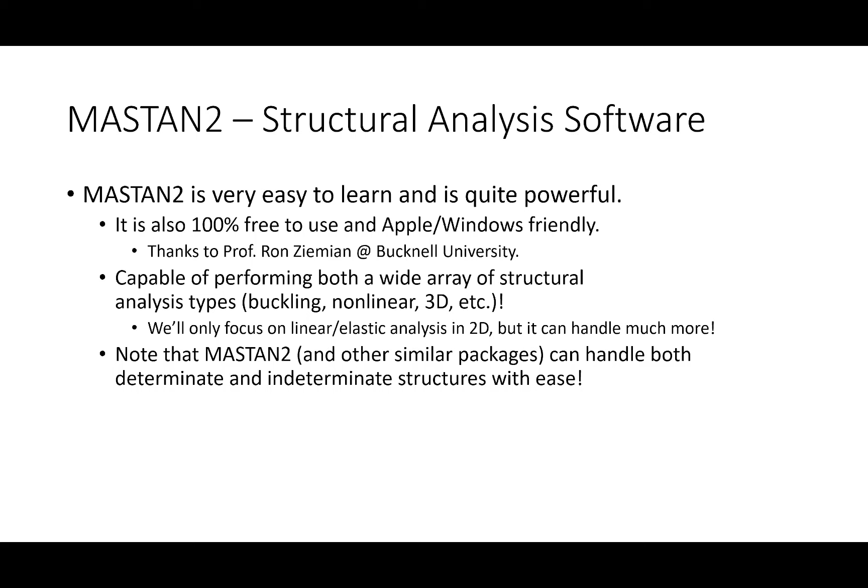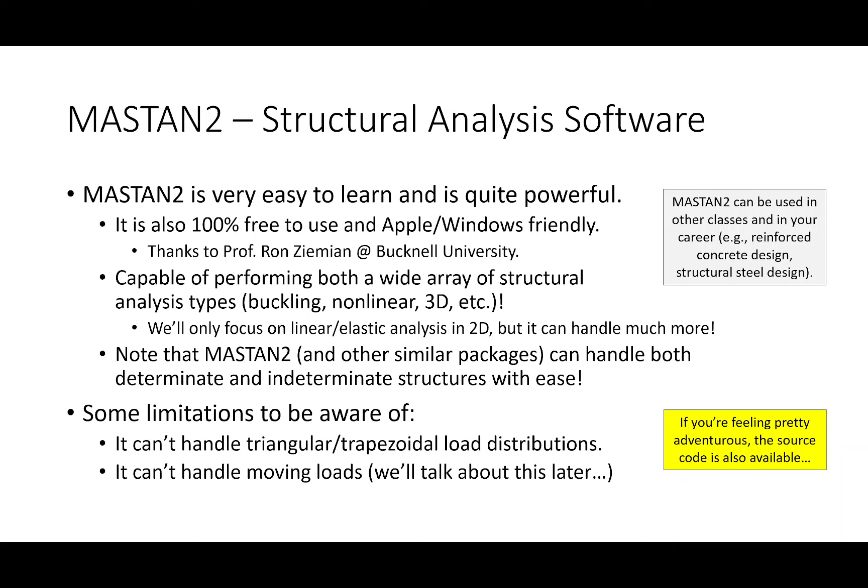There are some limits to MASTAN that I want to mention right off the bat. Number one, it cannot handle triangular loads or trapezoidal loads, so that's something you'd have to do on your own. And it cannot handle loads that move - moving loads will be the topic of discussion next week, so just wanted to mention that. But if you wanted to get adventurous and flex your MATLAB skills, the source code is available, so you could do that as well.

I get the feeling you all are like, let's move on. Okay.

We have not at all discussed indeterminate analysis. Now let's talk about indeterminate structures though. What we have done is classify determinacy. So I have here this structure drawn on the board - it's going to show up on the slides here in a little bit. But how would we determine whether or not this structure is indeterminate? Do y'all remember how to do that?

We calculate the I sub E value. Do y'all remember that? So what is I sub E for this problem up here? We have a pin support, a roller, and a roller, so we have 2, 3, 4 reactions. We have 3 equations of equilibrium. So this structure is indeterminate - indeterminate to the first degree, right? There's one too many unknowns. Okay, keep that in mind.

Okay, now first off, I should have a little bit of an aside as to why we would even use an indeterminate structure to begin with.

Indeterminate structures are, by their very nature, more involved when it comes to analysis. So if you're going to have to do all this extra work to analyze the structure, why even use them? Well, there are two really key reasons why you would use an indeterminate structure.

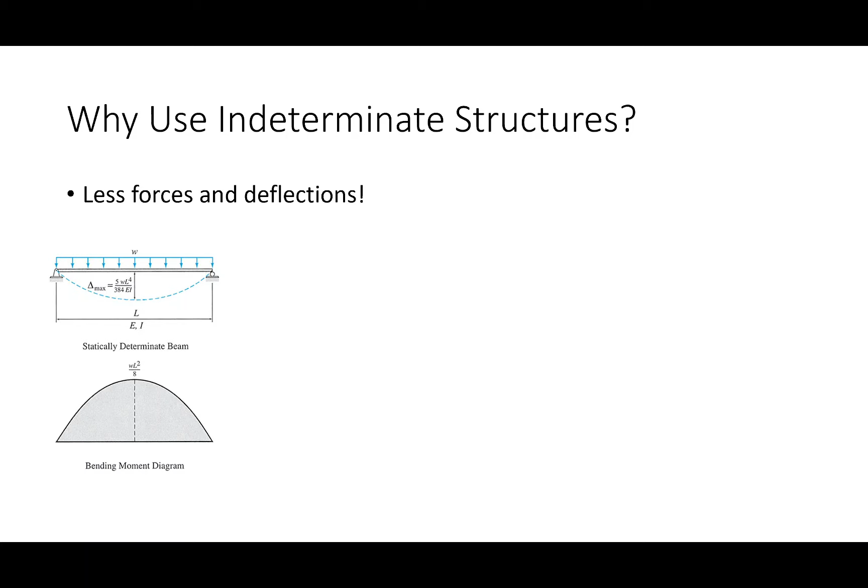The first is that indeterminate structures have a resulting internal response that's less than their determinate counterparts. For example, this is a simply supported beam with a uniformly distributed load. If I look at the midspan deflection, I can calculate that as 5WL to the 4th over 384EI. If I fix both ends, instead of 5WL to the 4th over 384EI, it's 1WL to the 4th over 384EI. So this structure has a maximum displacement that's just 20% of this one. So I could use a smaller beam. Saves money, right? What about the moments? This maximum moment is WL squared over 8. The maximum moment over here is WL squared over 12 or WL squared over 24. So less bending moments, less deflections, okay?

But the other advantage is that they contain redundancy. So if I have a bridge that has a pier in the middle, okay, like this one, that's indeterminate. If I were to stick a hinge right here, that would make the structure determinate, and I can solve it like I've been doing this whole semester. But if that central pier were to fail, that bridge is in the river, okay? But if I leave that hinge out and I keep the structure indeterminate, then if that pier fails, at least the structure is statically stable, okay? So adding indeterminacy adds redundancy to the structure in the event of certain elemental failures.

So why would you use an indeterminate structure? Well, you can use smaller elements and they have redundancy when they fail. That's a pretty good reason to use an indeterminate structure if all we're worried about is a little bit extra math, okay? Does that make sense?

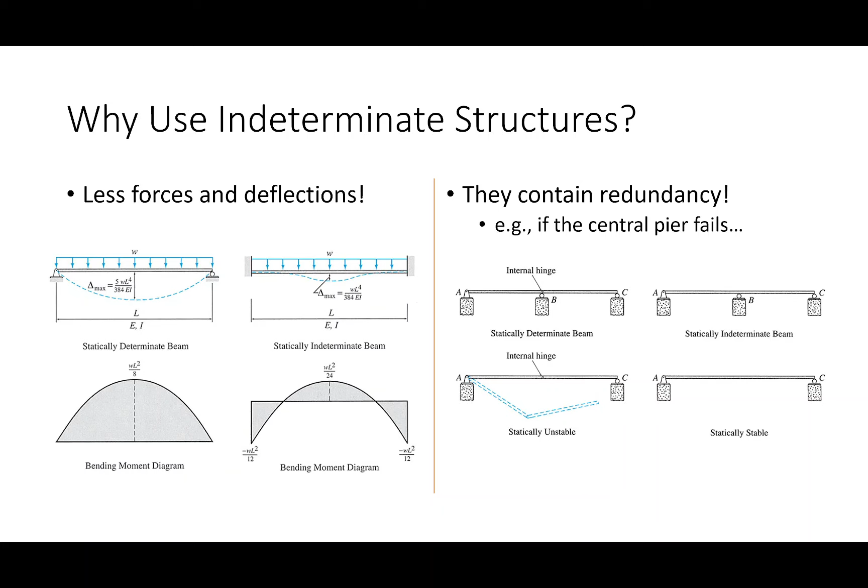Now, that doesn't answer our question in CE 312 as to how to analyze the structure with indeterminacy. So let's take a look at this problem. This is the problem that I have drawn here on the board. This is this problem right here.

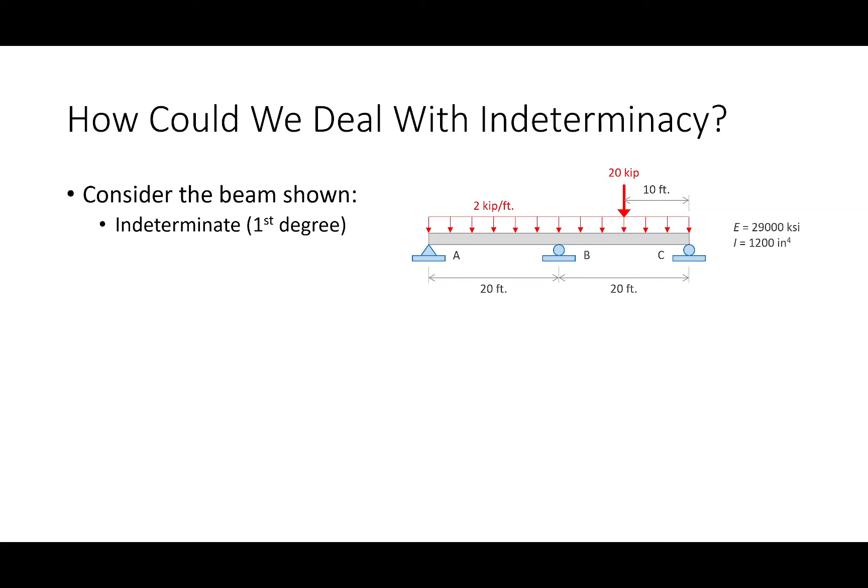So it's indeterminate to the first degree. What I mean by that is there are 4 reactions, 1, 2, 3, 4, and there are 3 equations of equilibrium. Now, we could easily solve for one of those reactions right now. There are, though, no horizontal forces on the structure, so we know this horizontal reaction is 0. That's easy. But we have 3 vertical reactions, and we really only have 2 independent, unique equations of equilibrium to relate them. So we have one too many unknowns.

So how do we handle this? The way that we handle this is we have to use the relationship between forces and deformations, and that is the key to any indeterminate analysis. So we weren't really able to have an intelligent discussion about indeterminate analysis until we had already discussed deflections. When you apply load to a structure, it deforms. If you understand that relationship, then you can analyze an indeterminate structure.

So let me ask you a question. What is the vertical deflection at point B on this problem? What's the vertical up and down displacement at point B? It's not a trick question. It's 0. Point B is a support. The beam is not displacing at point B. If I were to draw what this beam looks like when it deforms, it probably looks something like this. Would you agree it's going to kind of flex and bend something like this? But at point B, it doesn't displace at all, right?

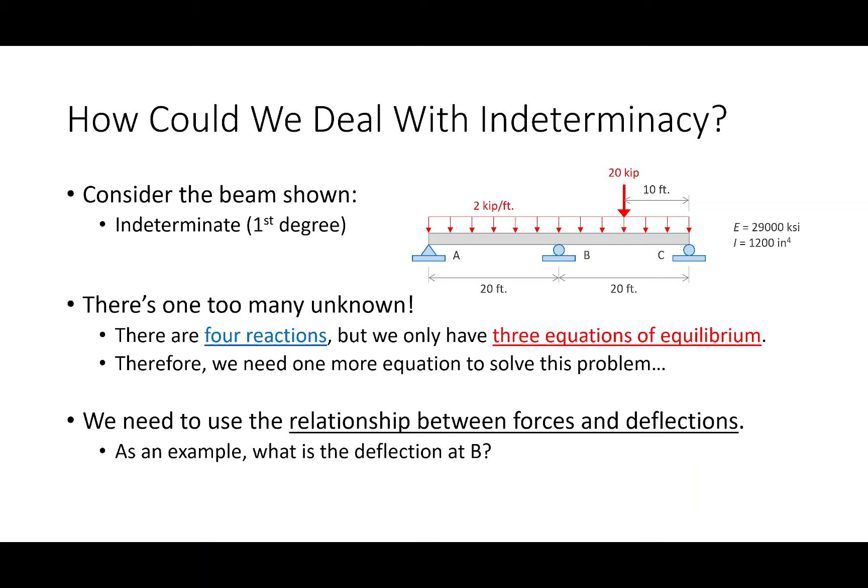Okay, so this is my original problem. I'm going to go through a very basic method for indeterminate analysis. The first thing that we could do is, here's a copy of the structure. What I'm going to do is I'm going to take this roller and I'm going to get rid of it. I'm just going to delete that roller from the structure. So it's gone. Is this problem one that you all can do?

Could you analyze this structure? Well, I mean, you should be able to. We just had tests on it, right? This is well within the realm of possibility. So what we'll do is we'll remove that roller, and we'll allow the beam to deform. So I'm going to call this the primary structure.

Okay, so this is going to be problem 1. What I'm going to ask you is, what is the deflection at B?

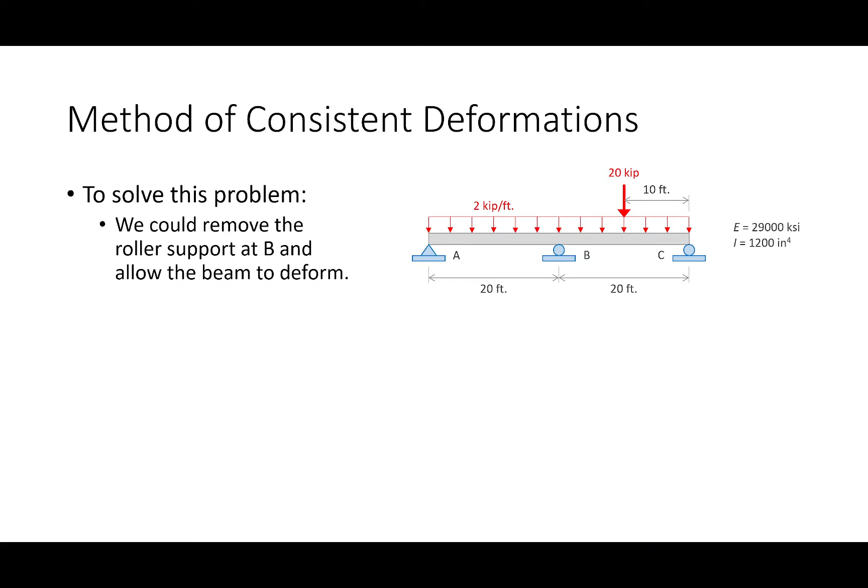So how do you solve for that displacement? Well, you take this problem, you've got a real structure, you do a virtual structure, integrate little m big M over EI dx, sum all that up. I'm hoping you all can do that. I propose that for this problem, you all can check me, this is well within your ability to do. I propose that delta B ends up being 4.22 inches downward.

Is that a reasonable value? Everybody with me on that? Okay, so that's problem 1.

What's problem 2? Well, problem 2, I'm going to call this the redundant structure. Here's how problem 2 works. So if I kick that roller off, would you agree that this deflects 4.22 inches downward? Everybody agree with that?

So what if I then ask the question, let's take the structure, no loads on it, just a blank structure, and let's put an upward force right here, call that By. Here's my structure, let's just look at this problem in a vacuum by itself. Would you agree that this structure is going to flex upward something like that?

Does that make sense? Maybe what we'll ask is how much does By need to be to push the beam upward 4.22 inches. That's a problem you all could probably do as well, right? Maybe a little bit more algebra, but this is definitely a problem you all could do.

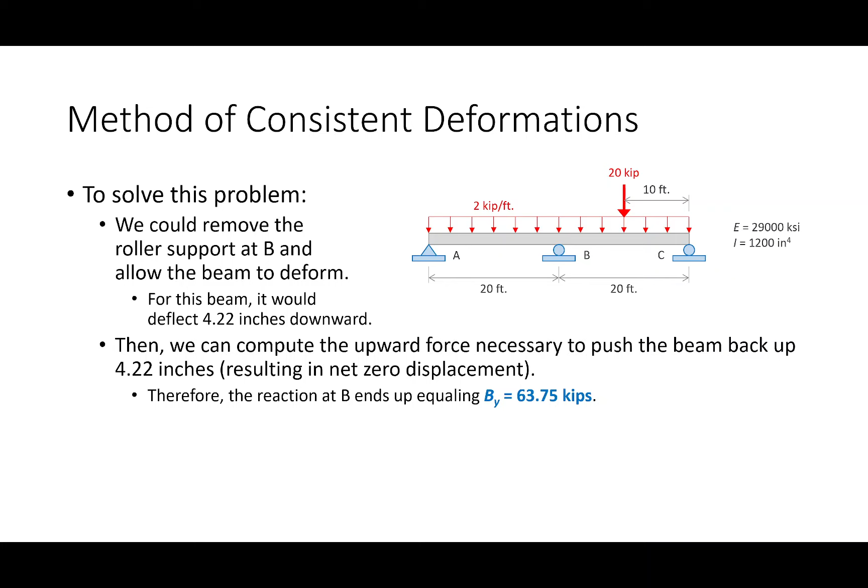You can solve that and you end up finding that the force, By, is 63.75 kips. Once you have that, you can go back to the original problem and say, let's just say that reaction is 63.75 kips, and now it becomes a regular problem. Solve for reactions, draw a shear diagram, draw a moment diagram, the problem's done.

That is the method of consistent deformations, and in a nutshell, that is the most bare bones basic indeterminate analysis method, but it'll work for pretty much any problem you would ever do. So you could get this reaction, that reaction, draw a shear diagram, draw a moment diagram, etc. That's the most basic indeterminate analysis method I can show you. Everybody with me so far?

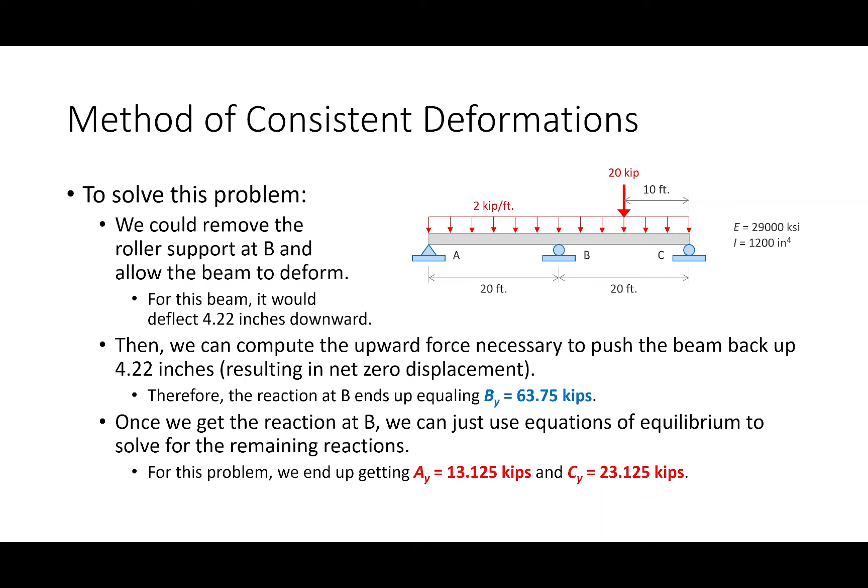Now, a question for you is, do we do this very often in practice? No. And the reason why is because it requires us to select a redundant. Now, everybody in this room is a human being, and we can look at the structure and say it kind of makes sense to select B as the redundant, so we'll deform, push up, etc.

But there's actually nothing theoretically wrong with choosing C as the redundant or A as the redundant. I could actually do the problem the same way. It would completely change the individual calculations and steps of the process, but at the end, theoretically, it would work. Why don't we do that in practice?

Well, the reason we don't do it in practice is because it makes the method difficult to standardize, and more relevant to today's discussion, it makes the method more difficult to write a computer program for. What we want to do is create a method that we can just plug a structure into, click a button, and it gives us an answer.

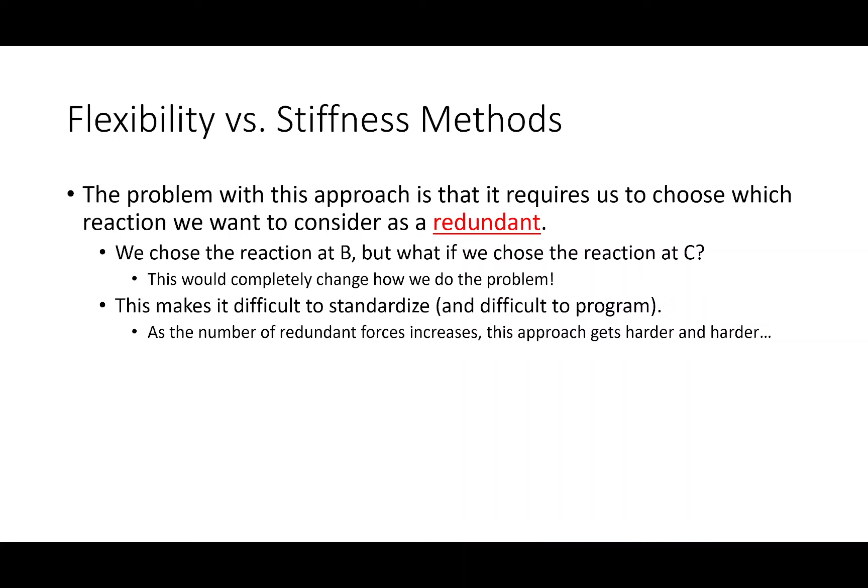And with this problem, let's also be clear, this problem had one redundant. The I value was 1. What if the I value was 47? How would you choose the redundants and how would you systematize the process? It would be a nightmare.

Instead, we're going to flip to an entirely different type of analysis. So what I have here on the board is what we call a flexibility approach. And a flexibility approach is where you're ultimately solving for unknown reactions, like you use this indeterminate approach to solve for unknown reactions. That's a flexibility approach.

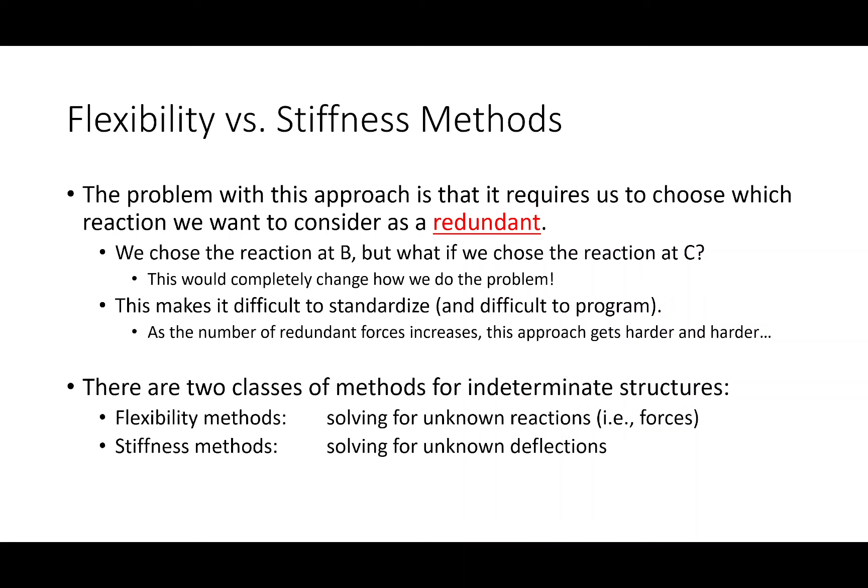A stiffness approach is where you're flipping the script and solving for unknown deflections. It is much more easy to program and standardize stiffness-based approaches. We're going to learn a little bit about that near the end of the semester. So the method that we use, and the most ubiquitous indeterminate analysis method in application, is what's called matrix stiffness analysis. I want to give you a brief insight into how it works.

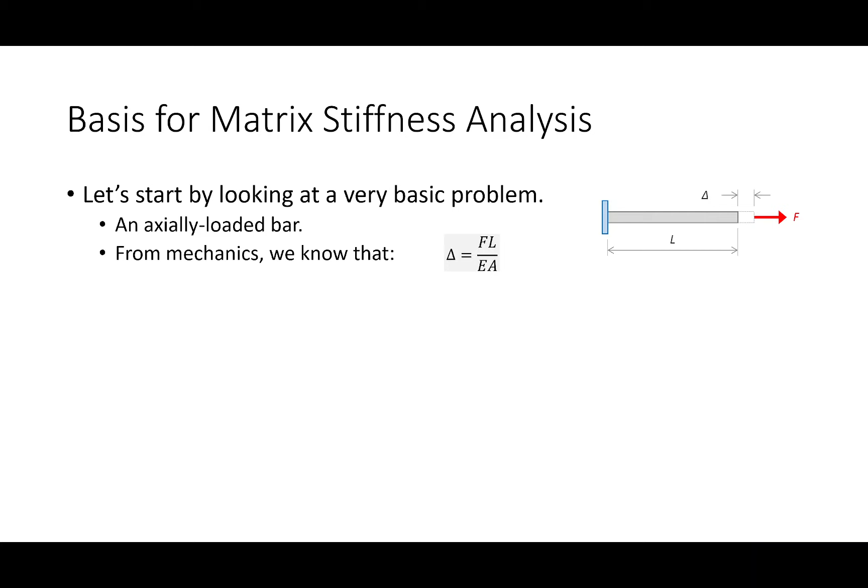Later on in the semester, we'll dig into it with more detail. I want to go back to Engineering 216, and have a very basic discussion about matrix analysis, about an axially loaded bar. I'm going to use this basic discussion to break down matrix analysis. So let's say I have a bar, I yank on it with some load F, it stretches some amount delta. You all should know that we can calculate that amount of stretch as delta equals FL over EA. I'm assuming everybody's comfortable with that.

So I'm going to rewrite that expression a little bit. I'm going to flip and multiply, and say that we could write F as delta times this term right here, EA over L. Or another way I could write it is F equals K delta, where K is what I'm calling the stiffness.

Do you all remember, it's probably Physics 211 where you had spring problems? Y'all remember that? There was a spring, and that spring had a spring constant, a spring stiffness K. Did y'all do that in physics? So it's the same idea.

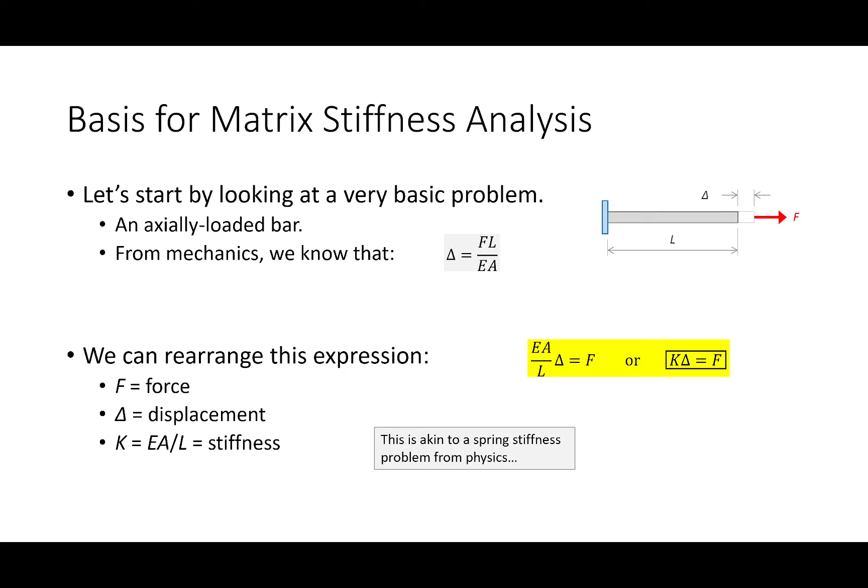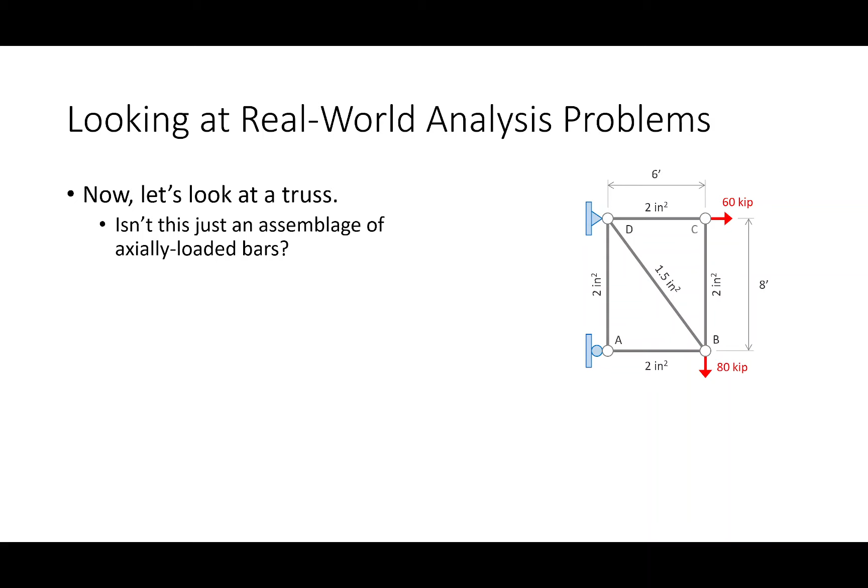For a given element in a structure, I can replace that element, or define a stiffness term for that element. Now I'm looking at a single bar, but I propose that this truss is just a bunch of bars. Instead of looking at it like this big old structure, I want to look at it as an assemblage of bars that are axially loaded. I'm using that term assembly very carefully because we'll talk about that later, how we assemble structures.

So instead of saying the force equals the stiffness times the displacement, instead I'm going to say, well, what about a force matrix equals a stiffness matrix times a displacement matrix? What we'll do is form a model that represents the entire structure and solve for it in one fell swoop. The reason why that's advantageous is because computers solve these problems very, very efficiently. They love doing matrix analysis, and they can do it like that.

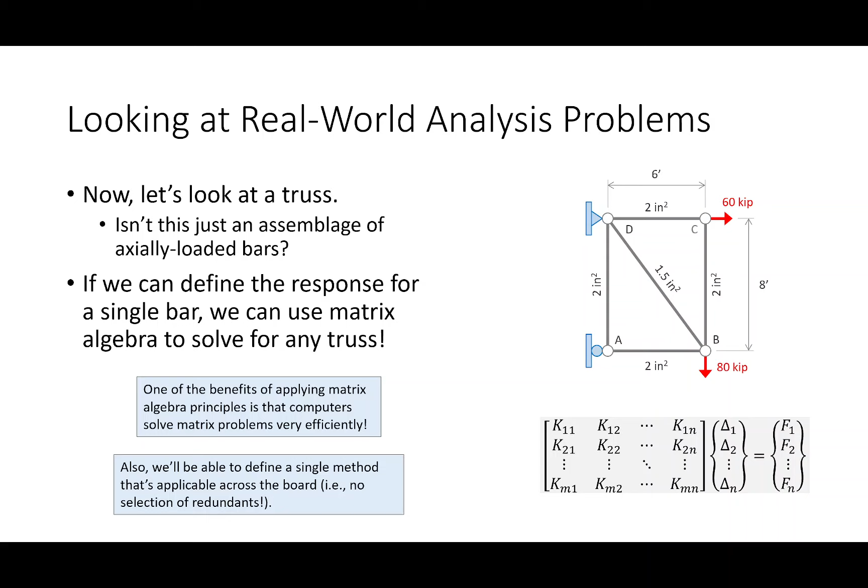So how does matrix analysis work? Here's how it works. I'm going to throw some terms at you that I'll be using over the next few days, so I want to make sure you're clear about that. The first thing that we do is what's called pre-process, which is just a fancy term for creating our model. For a given structure, we're talking about creating the geometry: the joints, the members, the boundary conditions, etc.

We're going to create the loads on the structure. We're going to apply the stiffness to each member, what material it's made out of, how big the sections are, etc. Once we do that, we click a little button called Go, and it just solves the whole thing. How does it do it?

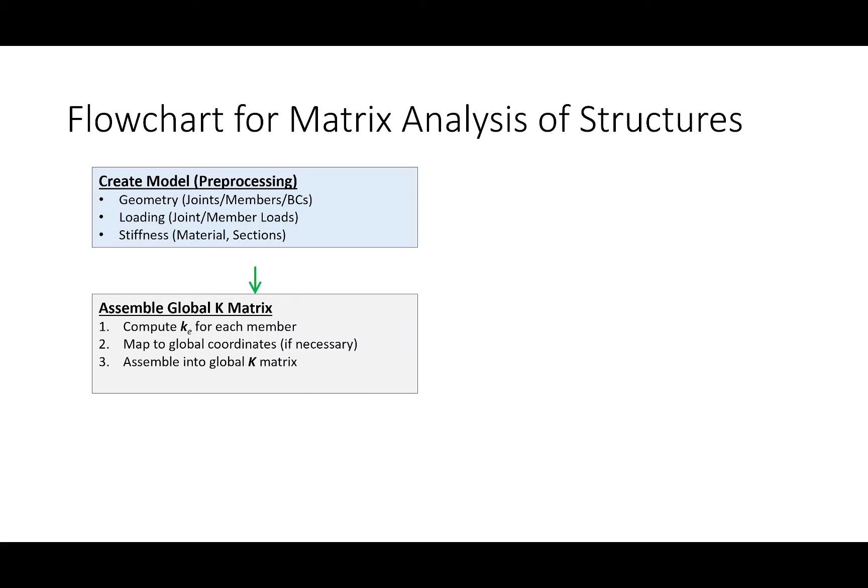Well, the first thing it does is it takes that spring value for each member, and it comes up with what's called a spring matrix, or we call it a stiffness matrix, a K matrix. So we get a stiffness matrix for each member, and we assemble them into a big old K matrix for the whole system. We do the same thing with the forces, because we define the forces that are on the model.

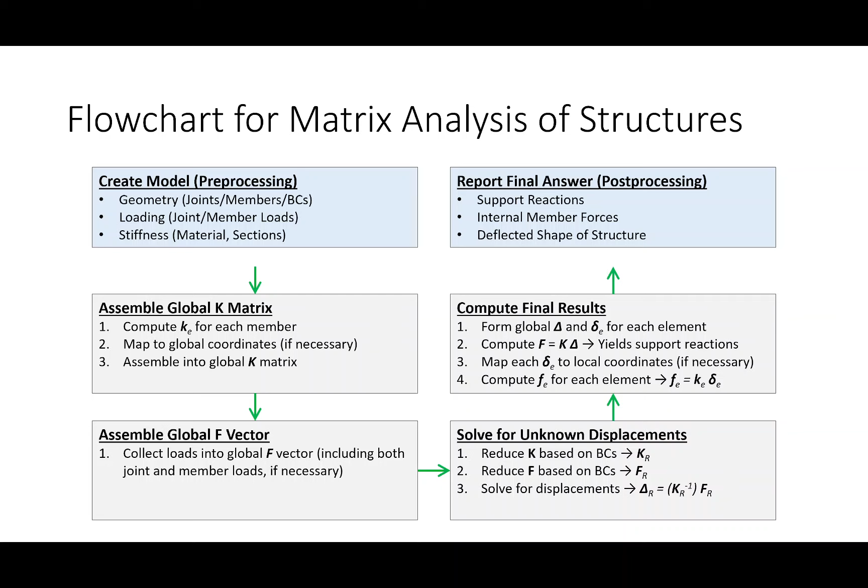So we have our stiffnesses, we have our forces, we then just solve for our displacements. It's just a simultaneous system of equations. Solve for our displacements, take those displacements, plug them back in on a member-by-member basis, get the reactions, get the forces in each element, and then we post-process, which is just visualizing the answer: looking at the support reactions, the internal member forces, the deflected shape, etc. We just click a button, it does the whole thing. We'll go through this process in more detail near the end of the semester.

Now, what we're going to do here are some really simple structures, but you can do finite element analysis for some really out there stuff. This was some finite element models that I created in my research group. We were looking at deformations in bridge girders that are under truck loads.

So this was the underside of a bridge as the truck was going over the bridge.

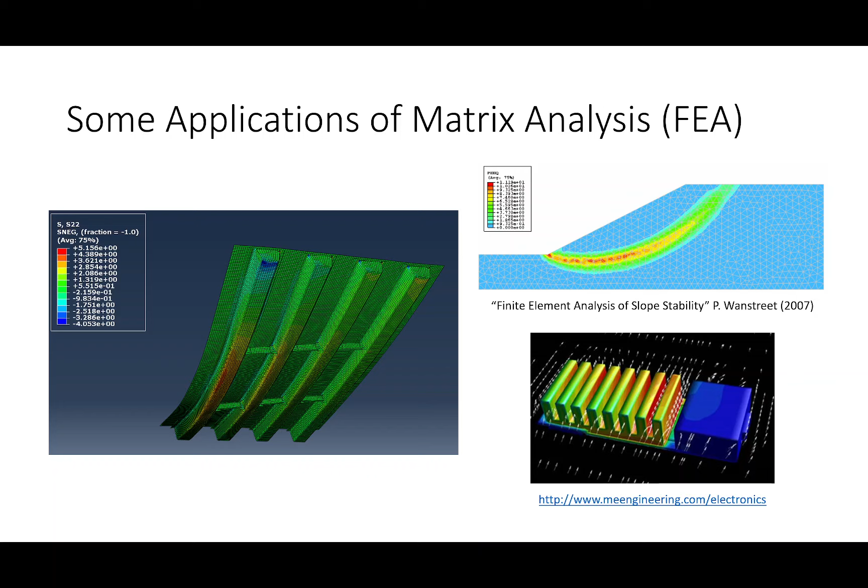This is a slope stability finite element analysis, looking at the slope failure surface and whatnot. You can even do thermal analysis and stuff. You can do some really crazy stuff with matrix analysis.

Okay, any questions? All right, so let's talk about MASTAN.

I've got a handout that I'm going to pass out, and it'll be sort of a guided exercise that we all do together. But before I pass that out, I want to make sure there are some ground rules on how MASTAN operates. This is really important because this is the type of stuff you can make a mistake on when you're running MASTAN.

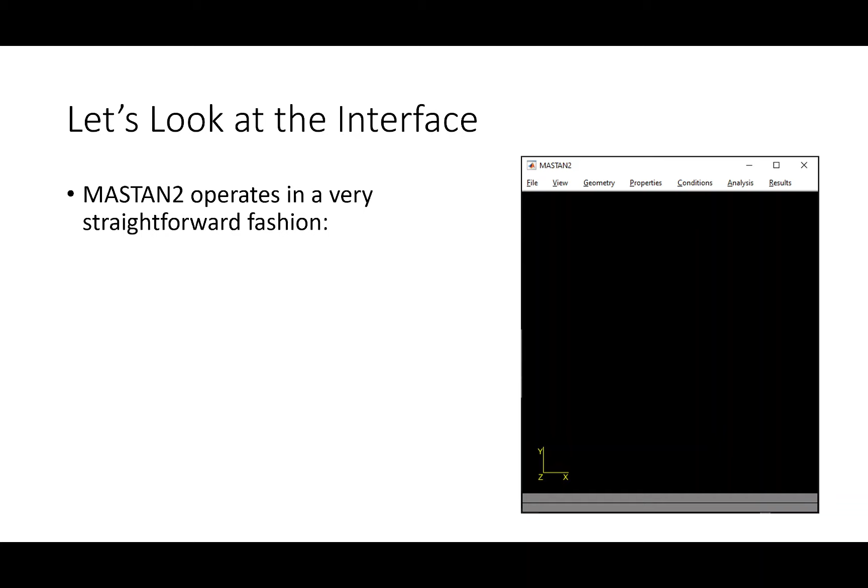So first off, if you run MASTAN, if you open it, it looks like this. It's a pretty basic interface. The first thing you should notice is you've got the menus up here. So what you do is you open the menu, and it'll contain all the necessary commands to build a model or execute a model.

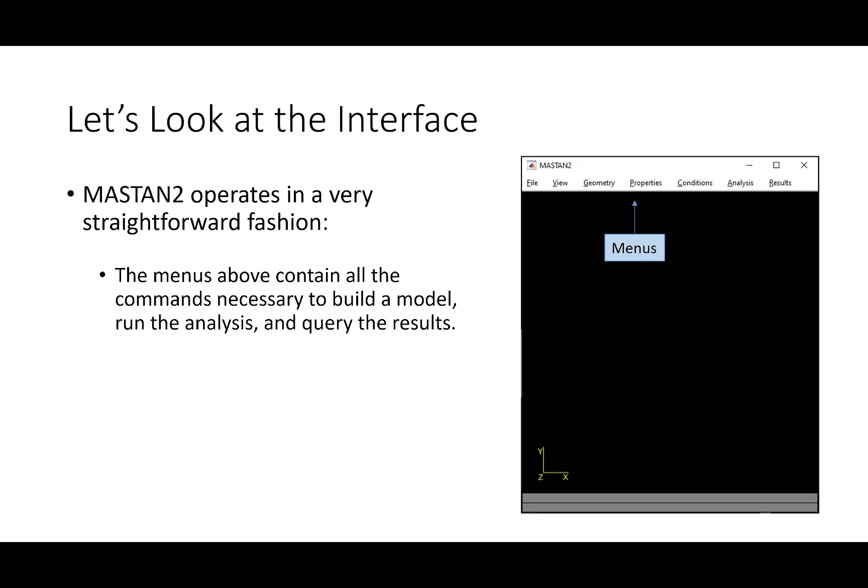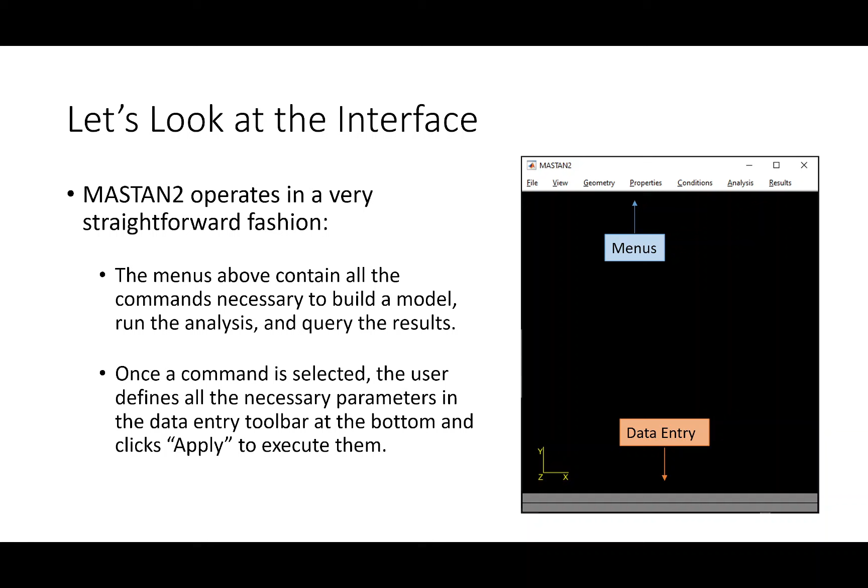So in the menu, you will call a command, and when you call that command, all the data entry for that command will be down here. So you just call a command up here, enter in all your values down here, click the little apply button, and everything will get executed.

There are several menus. I'm not going to spend a whole lot of time talking about the file menu or the view menu, but there are a couple things maybe worth mentioning.

In the file menu, there's an option to export a photo for a report. This is great for your homework assignments, because I'm going to ask you to do a homework where you're generating a model, and you can literally just export the photo right here. Creating a report is also kind of nice, because you can say, give me all the joint displacements, give me all the member forces, and it'll do it.

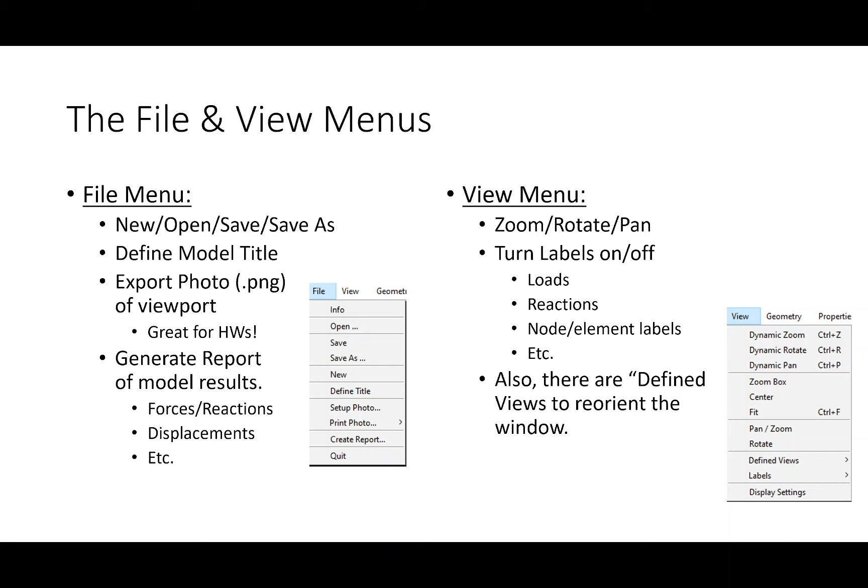The view menu, you probably won't use all that much, but this is if you want to rotate or zoom or what have you. Okay, units.

Let's talk about units. Whenever you're writing a structural analysis package, there are two ways to handle units. The first is to build a program that will convert the units for you. That is convenient, but the problem is if you're using a unit system that's slightly different, your hands are shackled. The other way is to just not incorporate a unit system at all and allow the user to use the units that they see fit.

This is how MASTAN works. There are some programs, like Abaqus, they make space shuttles with Abaqus, and this is what Abaqus does, so there's definitely a precedent for that. So as the analyst, you need to adopt a consistent unit.

So what I'm proposing we do here is we do our forces in kips, and we do our member dimensions in inches. Now, the nice thing about MASTAN is that when you're entering the coordinates, you actually do the calculation inside the data entry, so it makes it a little easier. You don't have to actually calculate values on the side, but you do need to multiply your member lengths by 12.

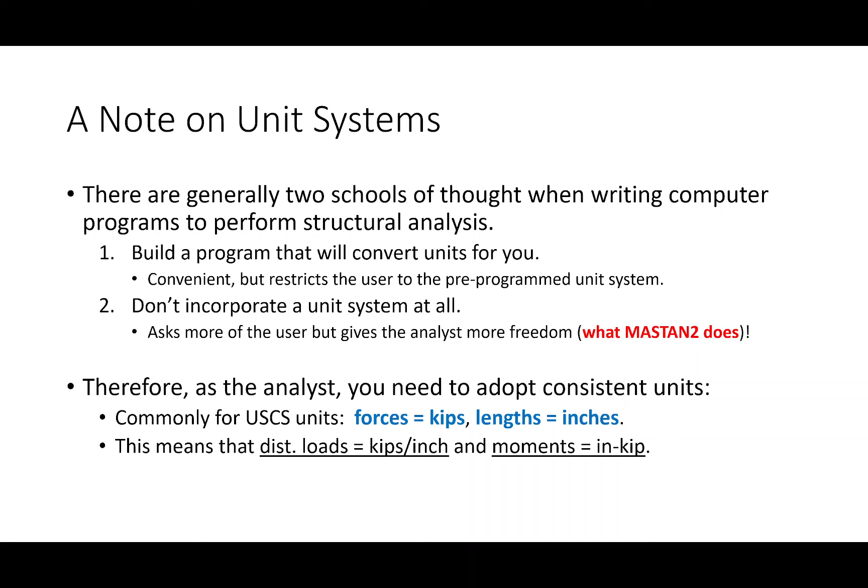You need to divide your distributed loads by 12. You need to multiply your moments by 12, etc. And that's why we do this, so that we have practice for it. Just wanted to make sure that was clear. Okay.

In terms of sign conventions and terminology: first off, terminology, I am going to use the term joint and the term node interchangeably. I'm going to use the term member and the term element interchangeably. They mean the same thing respectively, okay?

Units, again, kips and inches. I'm also going to want to make sure we're consistent in our sign conventions. So what do I mean there, okay?

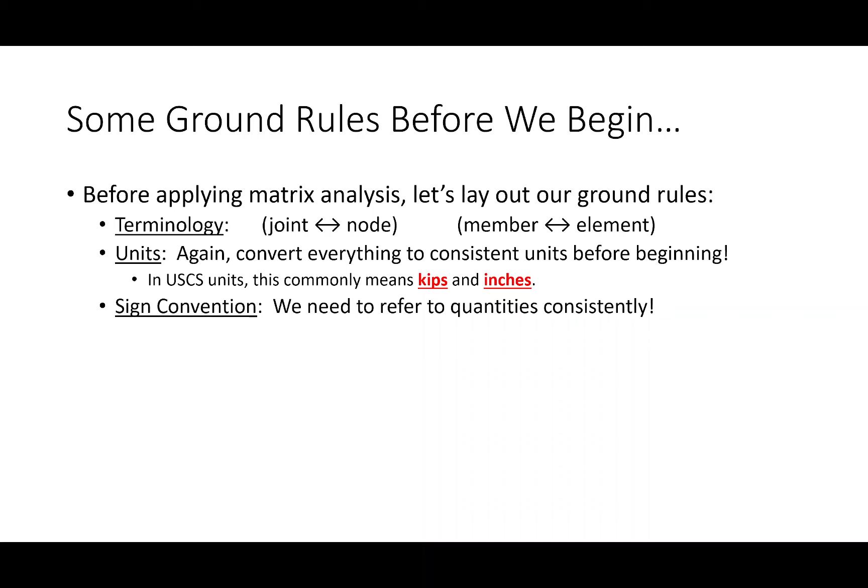For the x direction, we're going to consider forces to the right being positive. So, for example, if we do a structural analysis and we get a deflection in the x direction that's negative, that means it's to the left. So MASTAN is already adopting rightward forces and displacements as positive, and y direction upward forces and displacements are positive.

For rotations, it's assuming counterclockwise moments—counterclockwise rotations are positive. And for axial forces, tension is positive. The reason why is, like when we do a matrix style analysis, we have to write equations of equilibrium over and over again, so we have to have some sort of consistency in our sign convention. Also, we're going to keep things in 2D. We could expand all this to 3D, but we're not going to do that in here.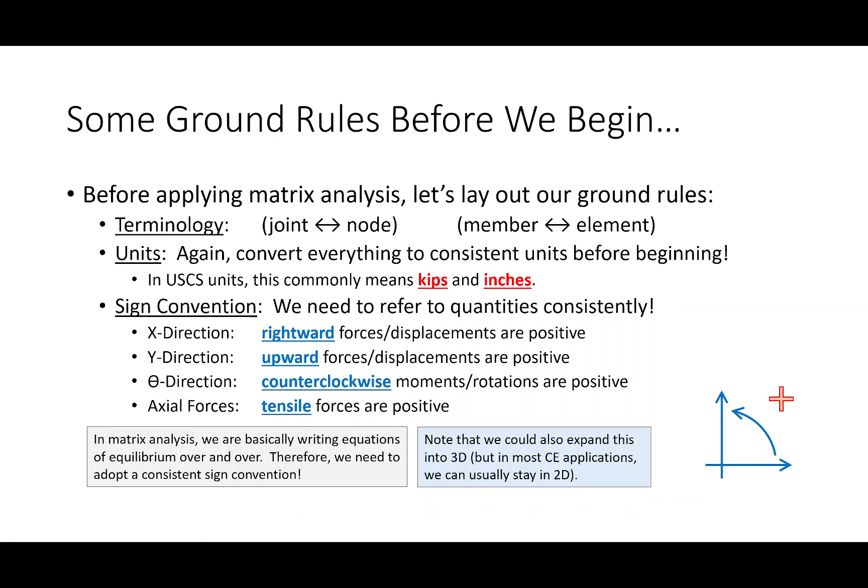In most civil engineering applications, you try and stick to 2D if you can. Building a model and running a model takes 5 steps.

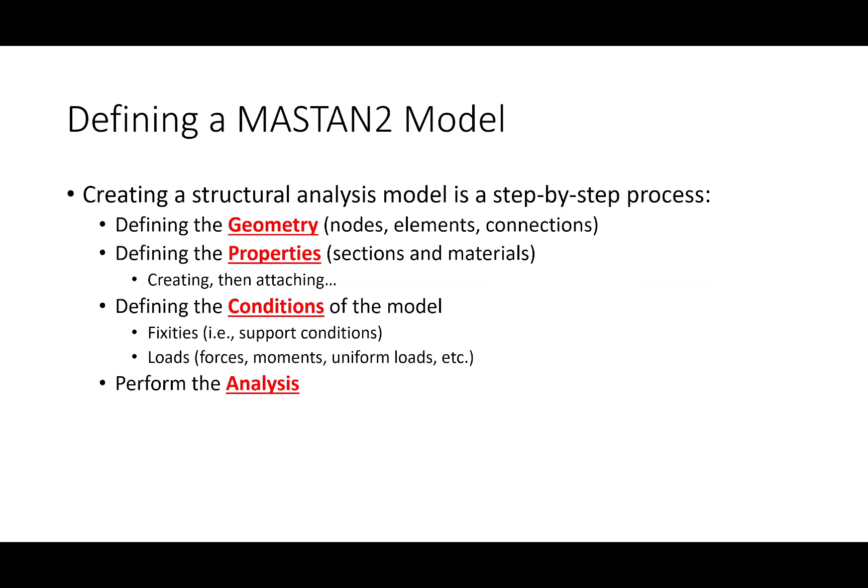First, you define the geometry. Then you define the properties and attach those to the material or model. Then you define what are called the conditions. I'm using the terms that MASTAN is reading, so if you look at the menu on the very top, it should literally have geometry, properties, conditions, etc.

You'll then analyze the structure and post-process the results. The model or example that I'm going to do with you here is this example. If you look at the slides, you'll see these little buttons so you'll be able to follow along with me and know what step I'm on as we do it.

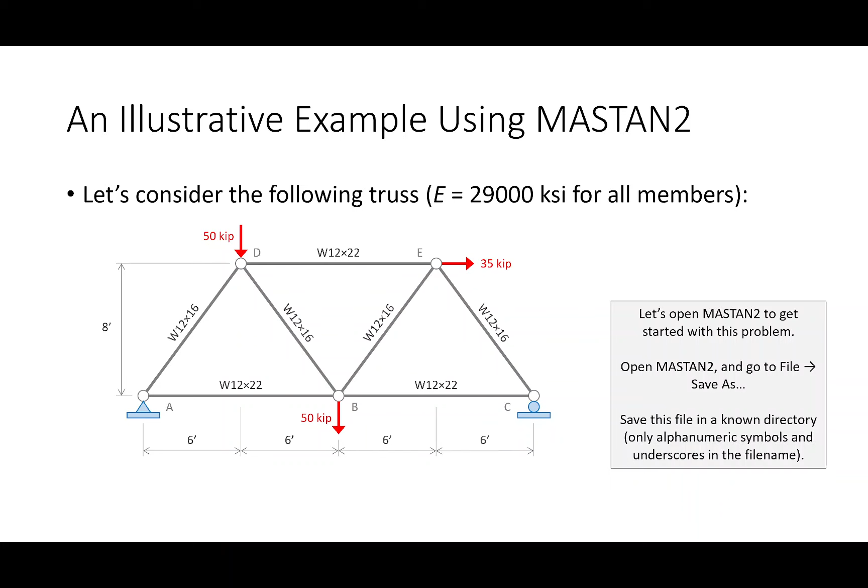This is a MATLAB-based program, so you do need to follow MATLAB conventions when naming files — no starting with symbols, no spaces, things like that. I'm fully fine with you all working a little bit on your own, but I'll say a few things while we're starting.

In terms of terminology, I said I was going to use the terms node and element interchangeably. A node is where the software directly computes deformations. The way matrix analysis works, you directly compute the deformations at the nodes, and everywhere else it's interpolated. So as an analyst, you want to place nodes at all the support locations, anywhere there's a hinge, anywhere there's a truss joint, anywhere there's a point load. If you have any other points of interest, go ahead and put a node there.

Elements are the regions — matrix analysis breaks down the model into these discrete regions that we call elements. It writes a stiffness matrix for that element and then assembles them.

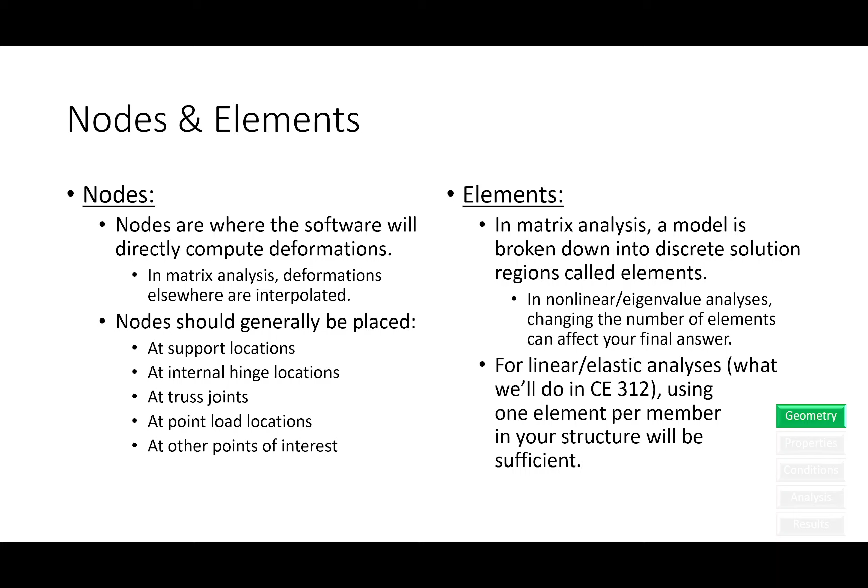For the types of analyses we're going to do, one element per member is completely fine, but if you're doing a nonlinear analysis — like for example this redundant structure — I would model it with an element from here to here and an element from here to here. But if this was a nonlinear analysis, I might use 10 elements and 10 elements, because the more elements you use, it can adjust your accuracy. But that's only in nonlinear land.

Whenever you're defining your geometry in MASTAN, the geometry is relative. For example, if I wanted to create these two joints, and these two joints need to be 100 inches apart along the x-axis, I could put this one at 0,0 and this one at 100,0. I could put this one at 0,36 and this one at 100,36. I could put this one at 25,0 and this one at 125,0. It doesn't matter as long as you use a consistent origin.

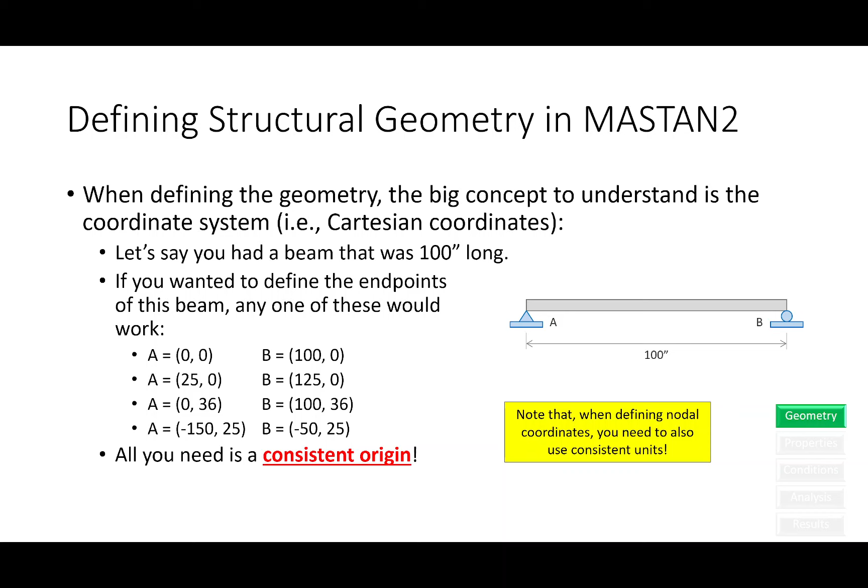If you look at the very first page on the handout that I provided, I'm assuming the origin is at node 1, so the coordinates of node 1 are 0,0. This is the y-axis, this is the x-axis, and I'm going to treat that as 0,0.

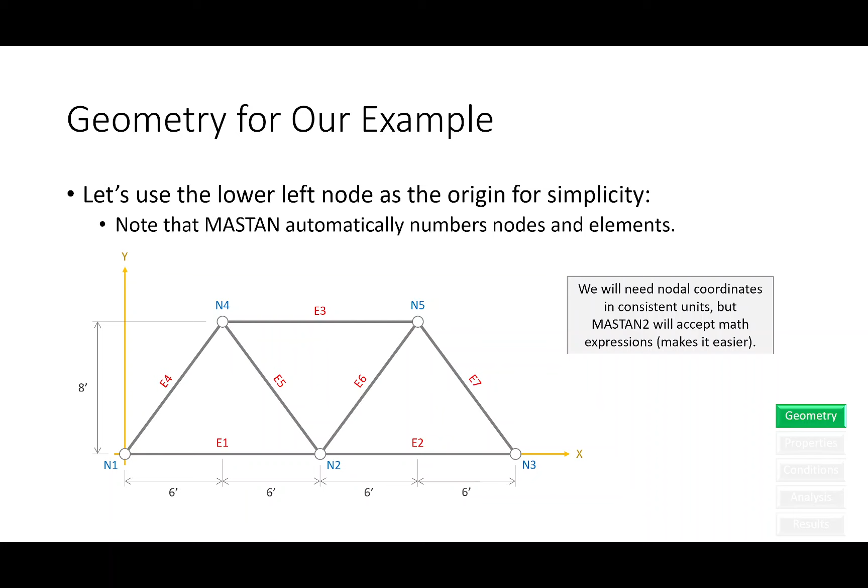One thing I should mention: nodes are numbered, not lettered. So they're not going to be A, B, C — it's going to be 1, 2, 3, 4, 5, etc.

First thing I want you to do is create your 5 nodes. Notice that when you're doing the data entry, you do not have to type the number 144 — you can do 12 asterisk 12, and it will do the calculation. So you can have MASTAN do the calculation for you. You do have to enter a z-coordinate for those, so the z-coordinate is 0 for all of them, but you should be able to create your 5 node coordinates.

Again, just go to geometry, define node, and go through that. I'll give everybody a sec on that before I jump on to the next thing.

Let's go back and see how everybody's doing with their nodal creation. Remember, you don't have to type in a value like 144 directly. You can enter 12 times 12 and it will work. You can do the math directly inside MASTAN.

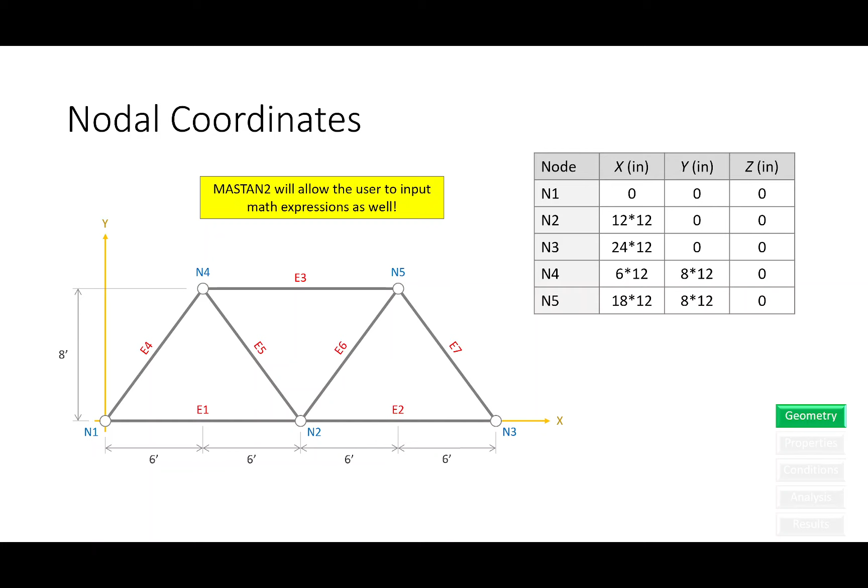After you create each node, for example if you do the first node, you'll enter 0, 0, hit apply, and you should get a message on the right that says success, node 1 defined. You'll repeat that 4 or 5 times. Also, if you need to delete a node, you can delete it and restart. I see some of you have nodes you probably need to redo.

Let's look at this. For N4 and N5, I'm going to cancel this, go to geometry, and move nodes. We're going to move this node and this node. How much are we moving it? We're going to move up the Y axis 8 times 12. Wait, oh, I need to click this. Yeah, okay.

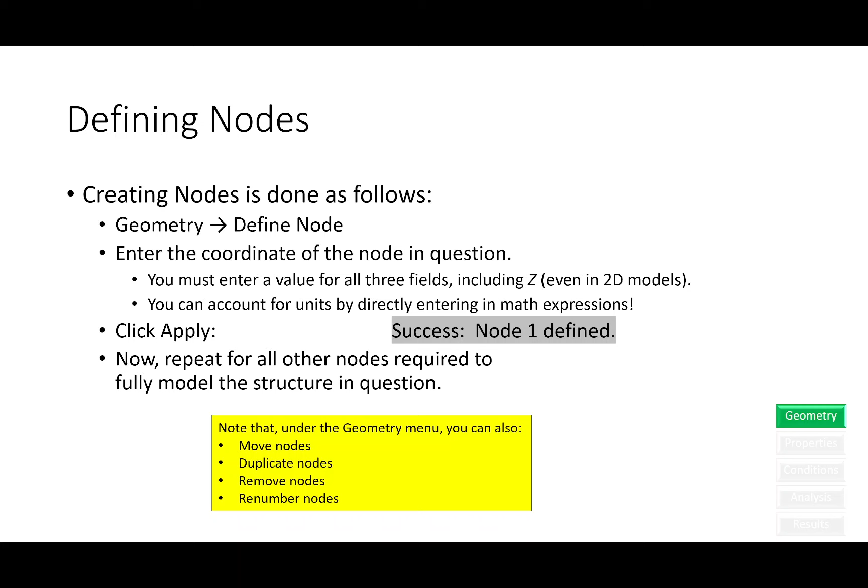MASTAN does give you a number of different means of correcting your mistakes. After you define the nodes, the interface should look something like this. I've inverted the colors here on the slide, so you're actually seeing a black interface with white text, but it should look about like that.

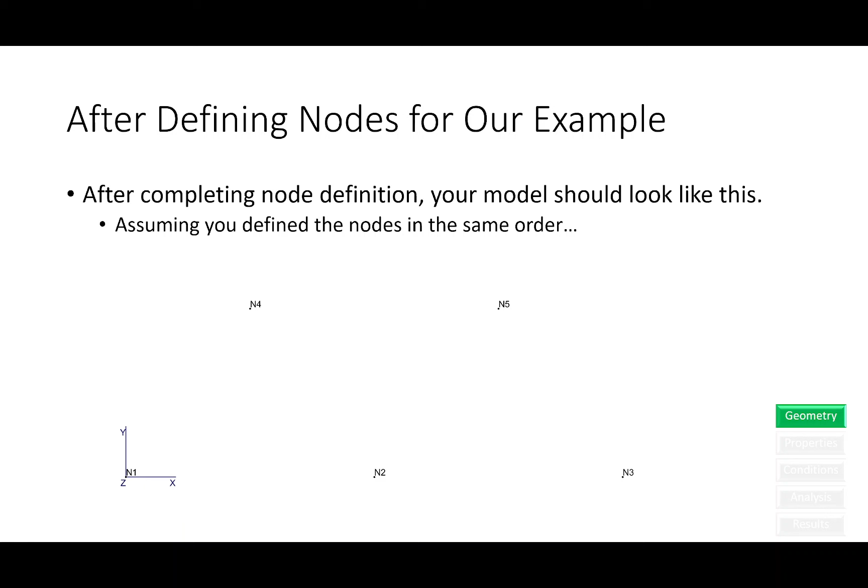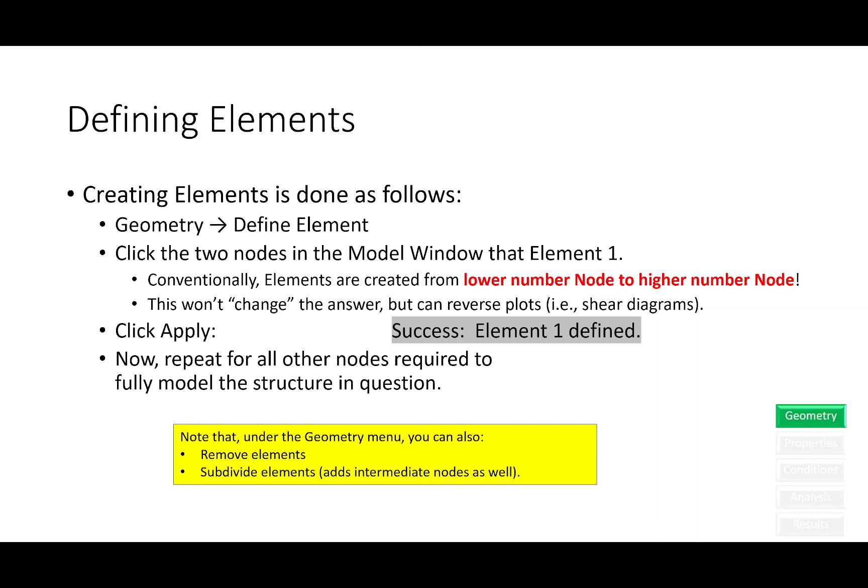Next you're going to define the elements. Defining elements is pretty easy because all you have to do is draw a line. One thing I strongly suggest in your modeling practice: when you create elements or members, draw the line from the lower numbered node to the higher numbered node. For example, this member right here, create it from N2 to N4, not the other way around. It won't really matter for this problem, but for beams and frames it really does matter, so get into the habit of going from lower to higher numbered node.

When it's all said and done, this is what your structure should look like after creating the geometry. It should have your 5 nodes and all of your members, and the members should be rendered with a dash dot, dash dot, dash dot line. MASTAN renders members as dash dot because they have no property definitions yet. Once you apply the materials and sections, the lines will become solid, so it's an easy way to see that all the properties are defined.

All right, everybody got that? Any questions about step 1? Step 1 is the geometry, creating the geometry. Anybody have any issues? And again, if you're chugging ahead, that is okay, I am fine with that.

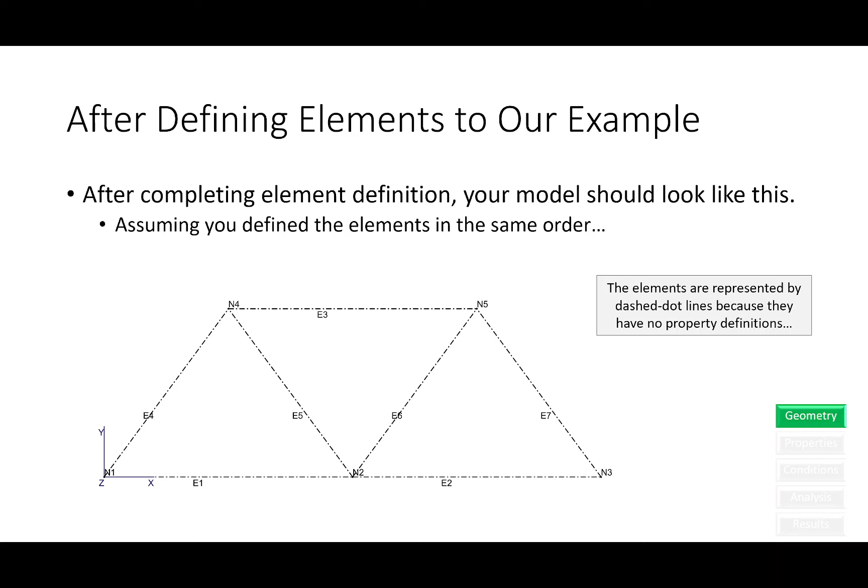A couple other points on member orientation. When you're creating members, it doesn't really matter about this thing called element orientation. Element orientation is when you draw the element from node 1 to node 2, but the element itself is rotated. That doesn't matter for trusses, but it does matter for beams and frames. Won't matter today. On Friday we'll use the geometry menu to define connections, since connections are how MASTAN models hinges and similar features.

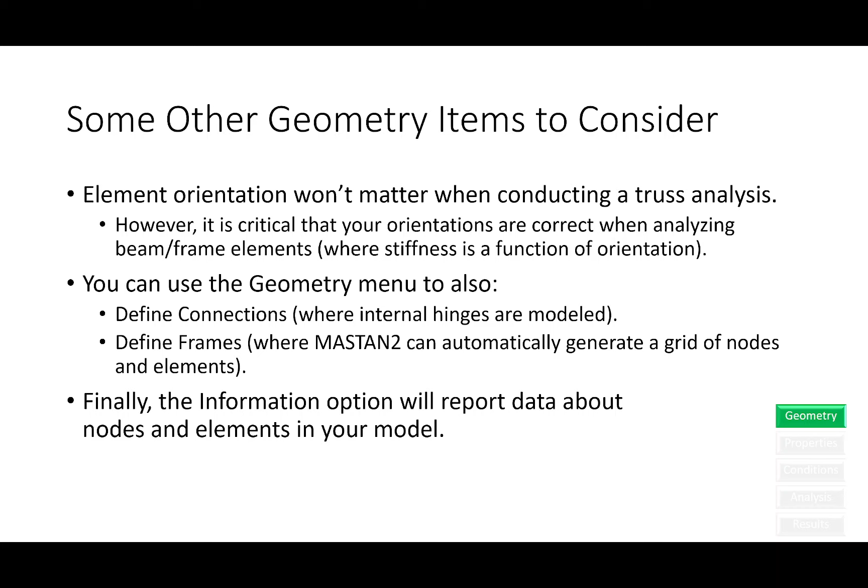All right, we're done with geometry, now we're going to move down to properties. In properties, you're going to create two things: sections and materials. Sections and materials are where, essentially, looking at this problem on the board, the materials give us the E value and the sections give us the I value. There are two ways to create a section: you can create one from scratch, which is what we'll do on Friday, but today we're going to use the library. The nice thing about the library is that all these sections are already in there.

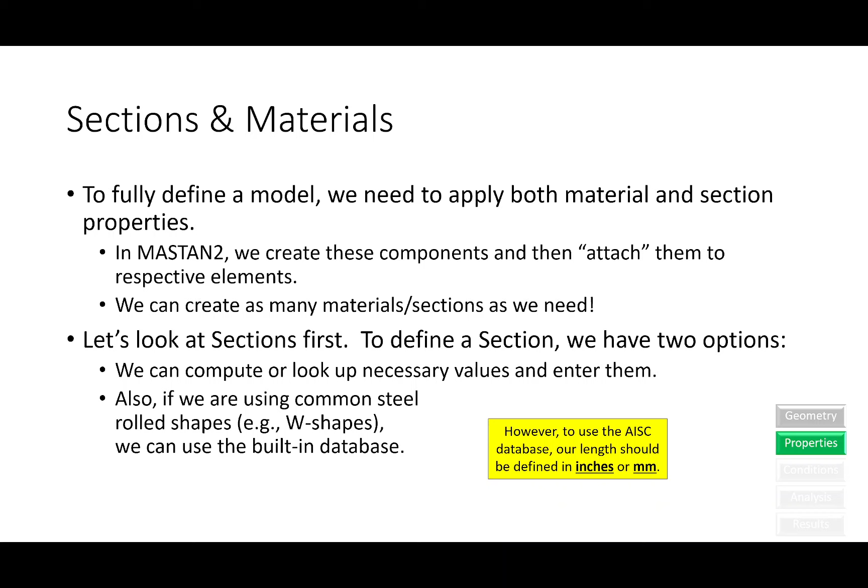So for example, one of the truss members that's horizontal is a W12 by 22. What you'll do is go to Properties and Define Section. Instead of entering in all those numbers at the bottom for a W12 by 22, just click the little database button and you'll get a big list. Just find the W12 by 22 - all the sections are built into MASTAN.

It's almost like I thought about that when I was devising your class project, and I would devise a project where you had to use sections that were already inside MASTAN. It's crazy I would consider something like that. It's like I was trying to make it easy on you or something. You're welcome.

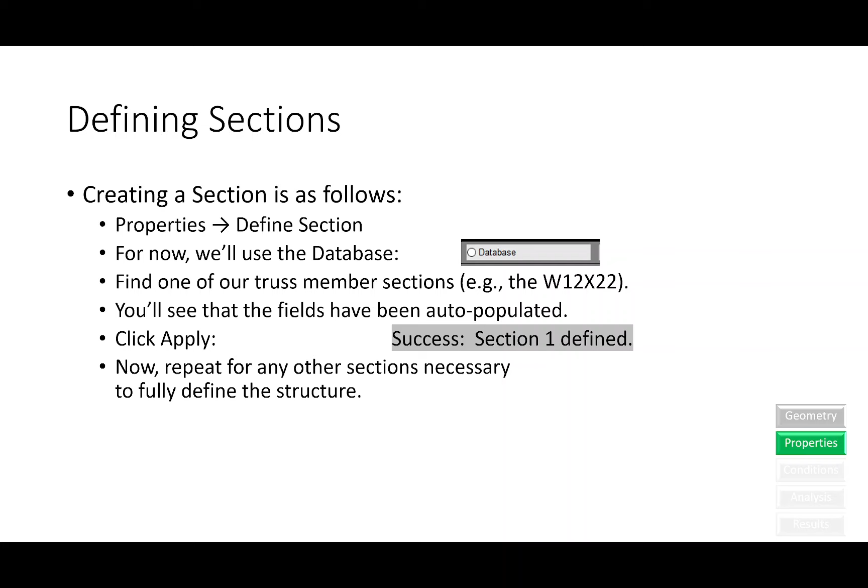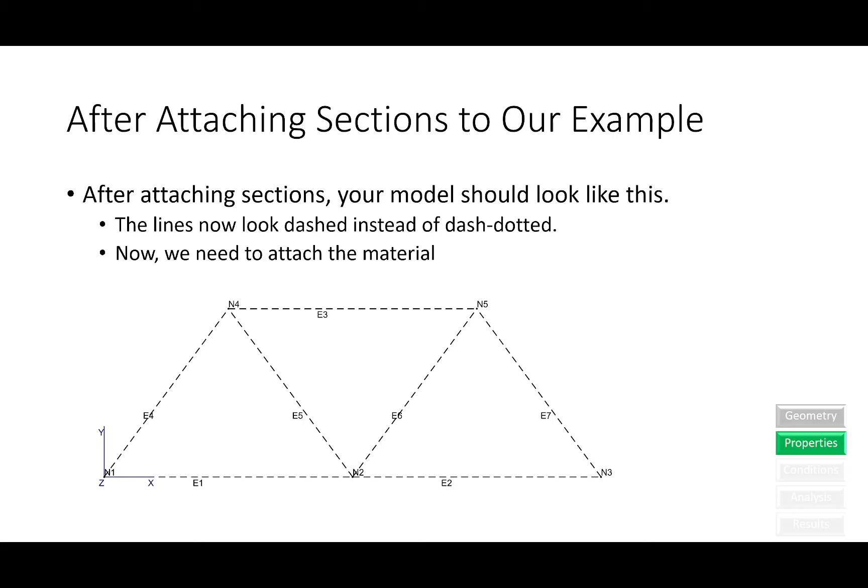Whenever you're assigning sections, you have to create the sections, then attach them. So you'll attach the sections to this, this, and this, then create another section and attach it to this, this, this, and this. The line rendering will change - it'll go from dashed dotted to dashed. That rendering says there's a section defined, but no material defined. Now the material - oh, I went ahead one too many.

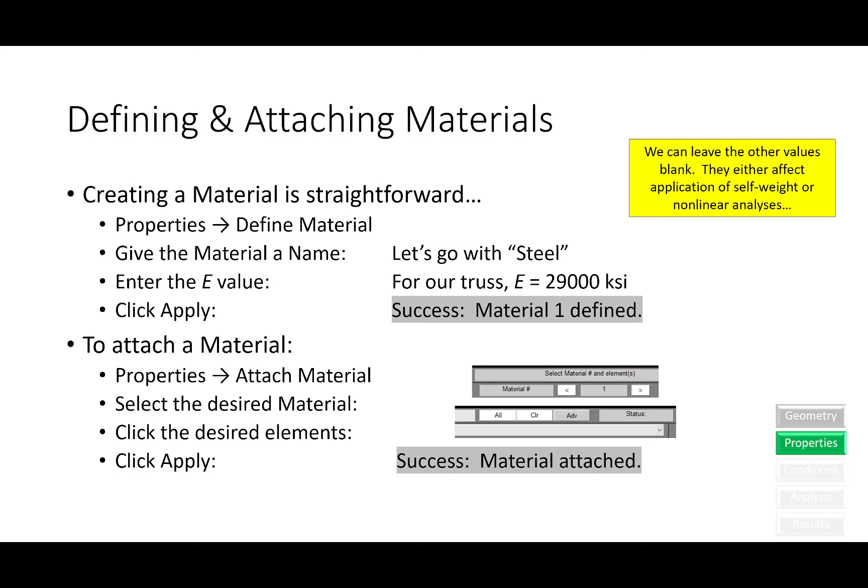Let me go back here. So for materials, you do have to create that yourself. We're going to define a material called steel, with a Young's modulus of 29,000. Notice how we're retaining kips and inches in everything - we put our nodal coordinates in inches, our Young's modulus in KSI. The section database is already in inches, so we're maintaining kips and inches. So we'll create a single material and attach it to everything. When it's all said and done, you should have solid line elements for the entire structure. I'll give everybody a second on that.

So I went to properties and define sections, and I accidentally did it twice. That's okay.

So properties, remove section - if you want, you can just remove them all. Hold on, let's see. Yeah, we'll just remove section 2. Then now, properties, define a section. See where it says section 2? So now you've already deleted the one, says 12 by 16? So now we'll just apply to section 2, define. So you just delete it and start over. Your modeling file is a little difficult to break completely, and you can always just delete something and restart. Would you define section 2 with the W16? How's everybody doing?

Dr. Mike, I got to the end of the materials part, and these two still look a little weird. Properties, attached material, select all, apply, view. Okay, I'm not sure that you attached your section. Did you attach the section to... Oh, you created a unique section for each one. You only need to create...

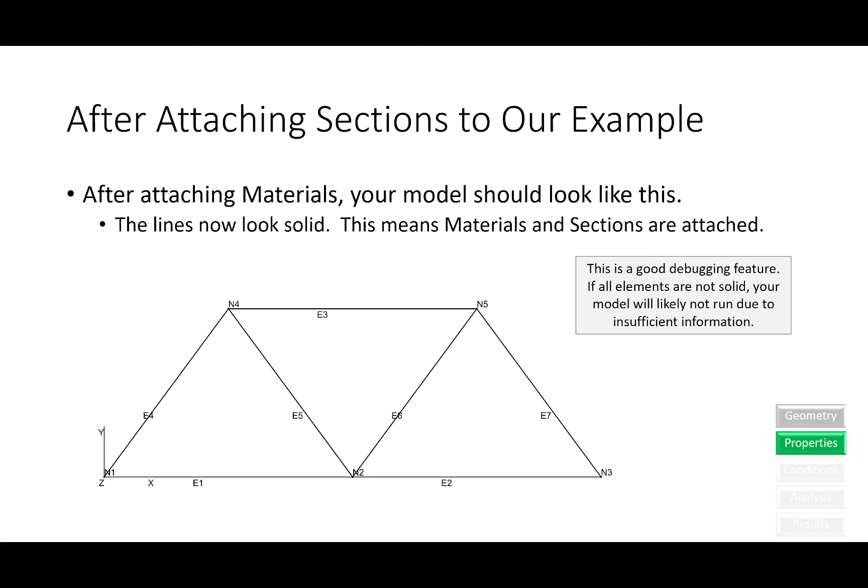Okay, I'm going to skip ahead just a little bit. So we're going to get into our conditions now - this is the last thing we have to create before we actually start running the model. We're looking at 2 different types of conditions: fixities and loads. Fixities are our boundary conditions - the pin support, the roller support, etc.

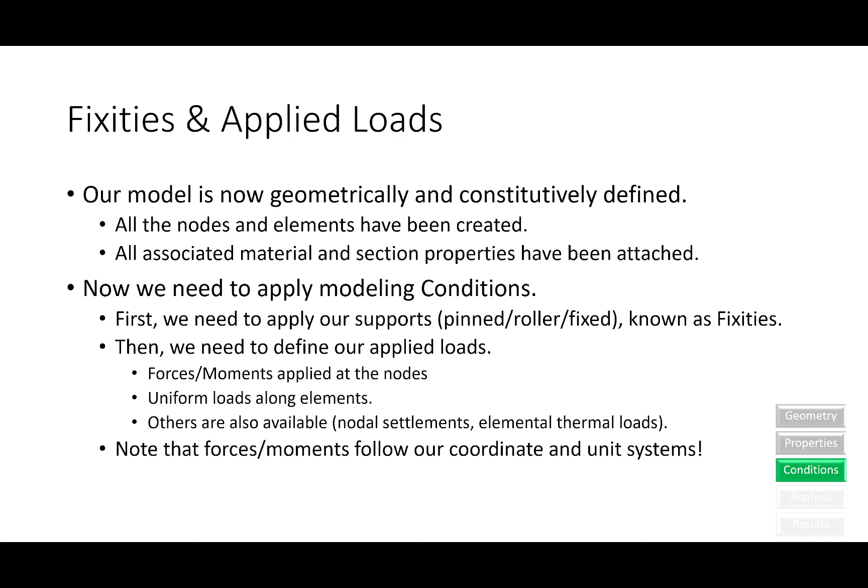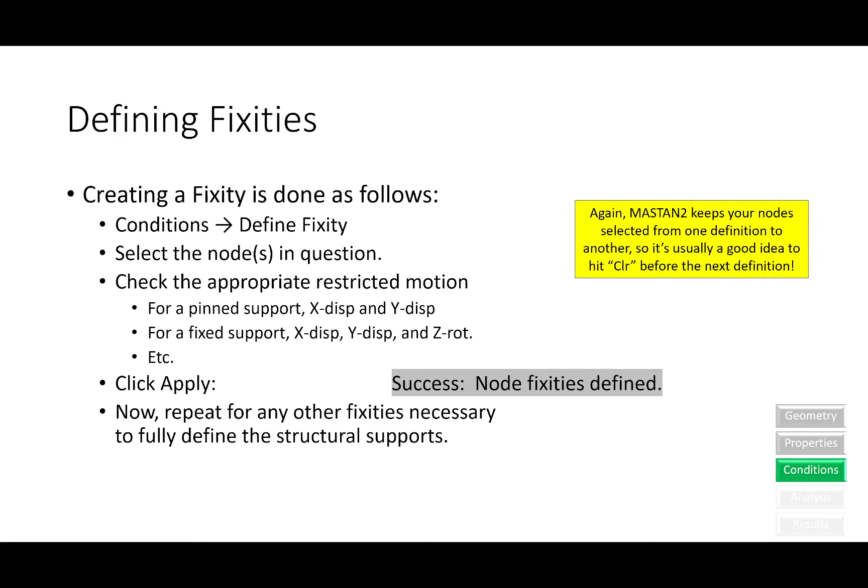Once we do the fixities first, then we'll do the applied loads. For defining fixities, all you have to do is conditions, define fixity, and apply accordingly. Now the way that you have to do your fixities - I'll show you how this works on the next slide. My advice is to do it 1 node at a time. So node number 1 is a pin support.

So it has an X and Y fixity. What I would do is define your fixity for node 1, do X and Y, hit apply, then hit the clear button, and make sure that only the Y is created. One common mistake with fixities is applying too many, but that's okay, you can always completely exit the fixity command and recreate them. Just make sure you're going Y for node 3 because it's a roller, and X and Y for node 1 because it's a pin.

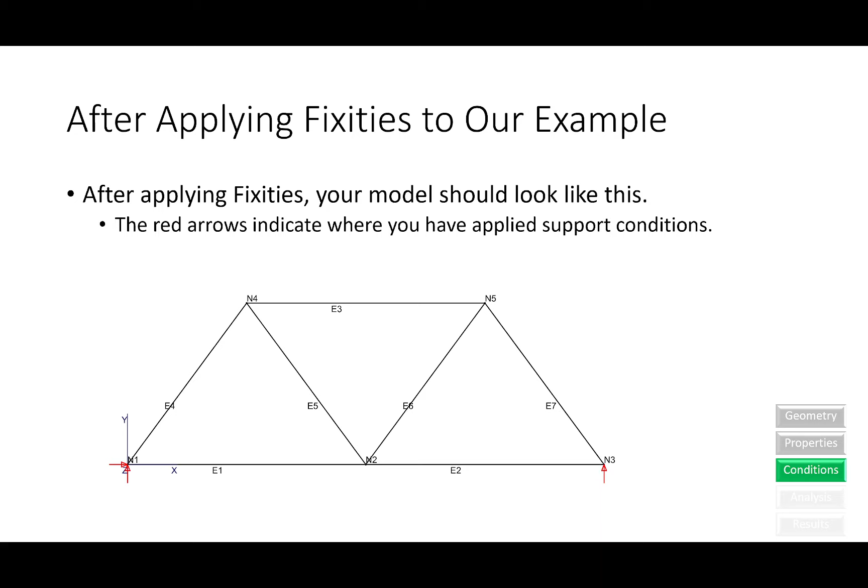Alright, I feel like most of you are making this work. Okay, so is everybody good up here?

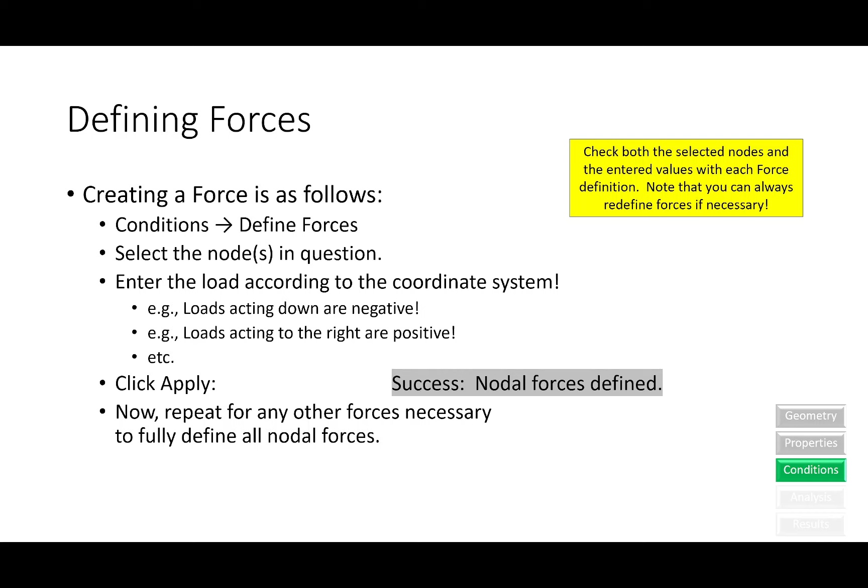For your loads, it's pretty straightforward, you just do it on a node by node basis. The big thing you have to make sure of when defining nodal forces is that your sign convention is handled correctly. For example, at node 4, there's a vertical load acting downward, so you need to apply that as a negative force. For node 5, there's a horizontal force acting to the right, so that's a positive force. Positive forces are to the right and up, negative forces are to the left and down. So you're going to have a negative Y, positive X.

You don't need to do any unit conversions because it's in kips, and since everything's in kips and inches, everything's all good there. At this point your model is ready to run. When you're ready to run, you're looking for all of the members being solid, all your boundary conditions applied, and all of your loads applied.

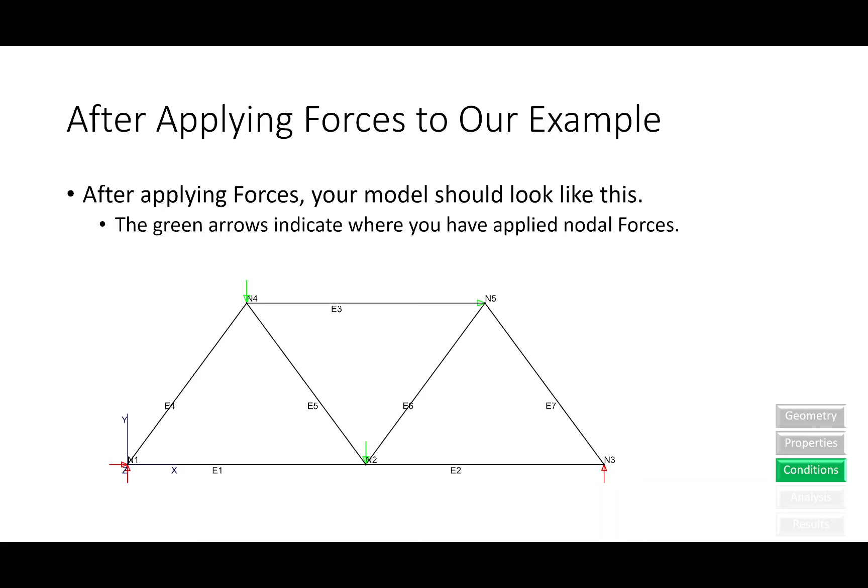Actually analyzing the structure is really easy. All you have to do is run a first order elastic analysis, that's it, just first order elastic. Make sure the option at the bottom says planar truss. If it says planar frame, your answers are going to be a little off, so make sure it says planar truss.

On the analysis, I've got two things that have a first order elastic option, they're static and time history. Which one? Static.

Time history, that's different. If we were trying to simulate something like an earthquake, that would be like doing a vibratory analysis.

Do you like my sound effect? I do, hyper technical, that sound effect. I'm a dork. I know, it's okay.

If you've done it correctly, it should say applied load ratio equals 1, success complete. Whenever you're doing a non-linear analysis, it increments the percentage of load, and for each little increment it figures out equilibrium. So if the load ratio is 1, it means it was able to apply 100% of the load successfully, which is what we want.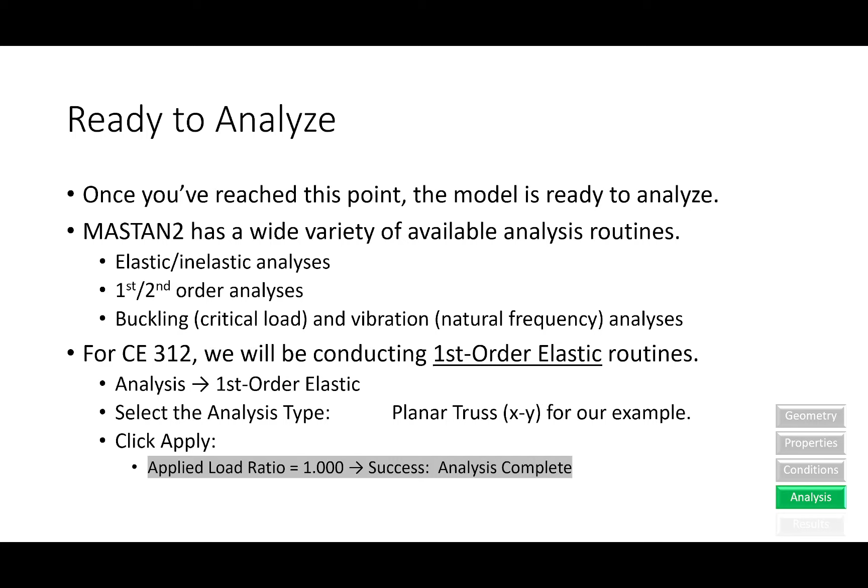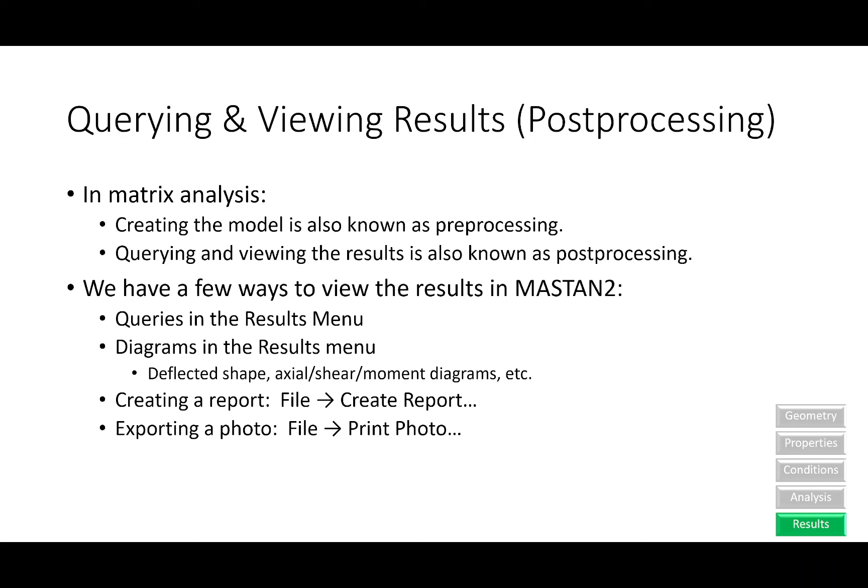For post-processing the results, it's pretty straightforward. Pre-processing is creating a model, post-processing is viewing the results. We can do that a few different ways. We can create a report, so if you go to File, Create Report, you can say give me all the internal member forces, give me all the displacements, and it'll spit it out, which is a brilliant option for your project, because MASTAN will create a report that puts it all into a nice Excelable table, and Excel will be your friend on the project.

Just so you're aware with deformation, here's how the scale factor works. The real deflection, if you query the actual displacement, might come out to be like 0.2 or 0.4 inches. I cannot visibly see 0.2 inches on a member that's 20 feet long. So that deformation scale factor, if it says 40, it's multiplying all your deformations by a factor of 40 so that when you look at the deformed shape you can actually visually interpret it. That doesn't mean the structure is actually deforming that much, it's just so you can see it visually.

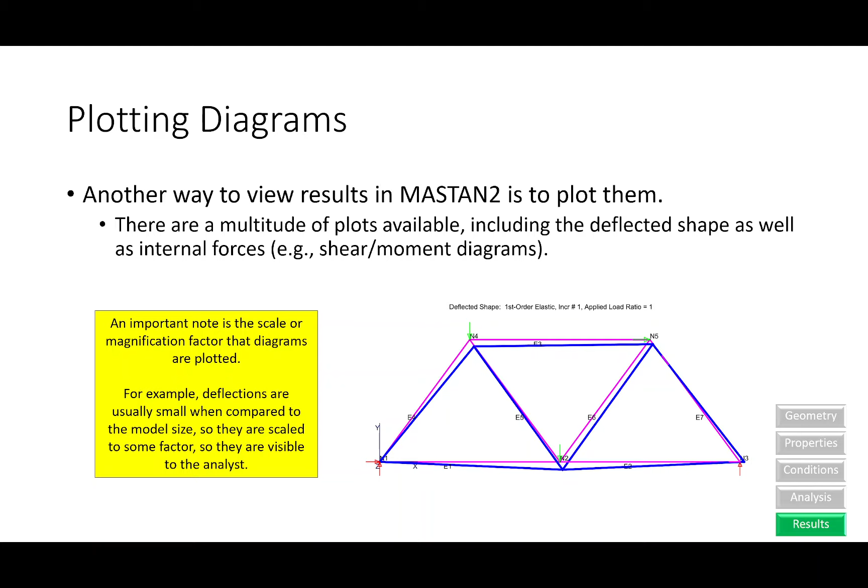So that's our deflected shape, we can plot our deflected shape, we can plot our internal axial forces, report those, etc.